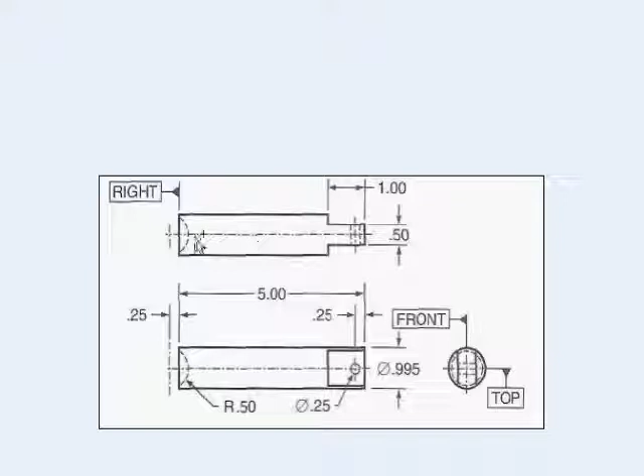I'm going first to draw this section that you see here. Then I'm going to revolve it about this axis, and then I'm going to draw this part on the surface of the already revolved part and extrude it. Then last I'm going to place my hole. Okay.

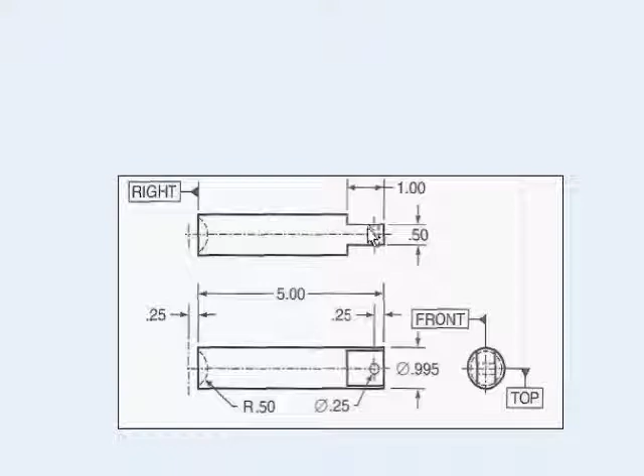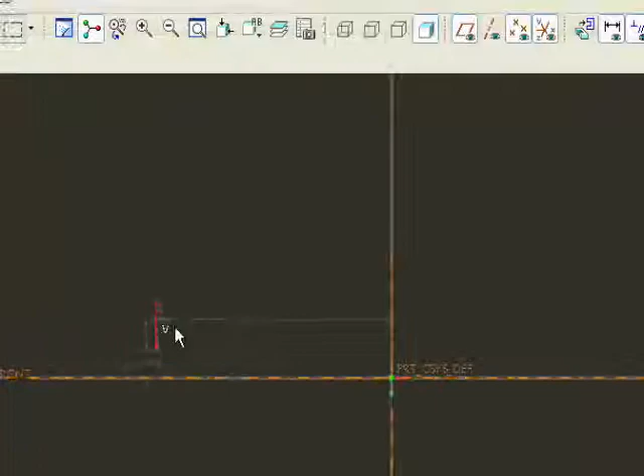For the planes, actually I'm going to be drawing this section on the top view. So we choose the top view and we go to sketch. First we choose line. This line is 0.995, half of it is about 0.4975. So we go here and we click

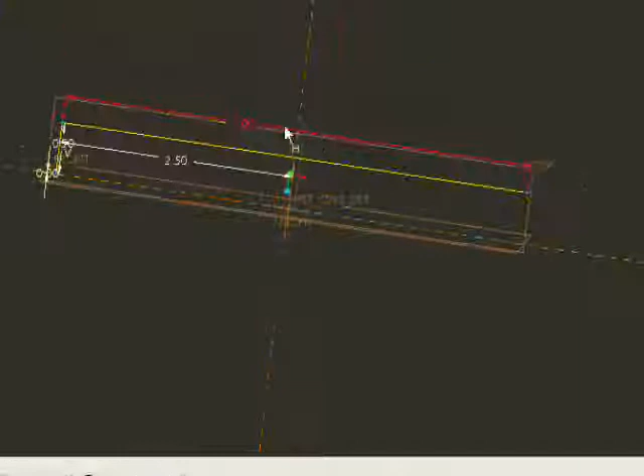0.4975, enter. And this distance is 5, so half of it is going to be about 0.25. Oh, I'm sorry, it's 2.5. So this is 2.5. No, actually we need to draw it 5 minus this distance, which is 1, so it is going to be 4. Only 4 is needed, 4 inches. And then we bring it to the center.

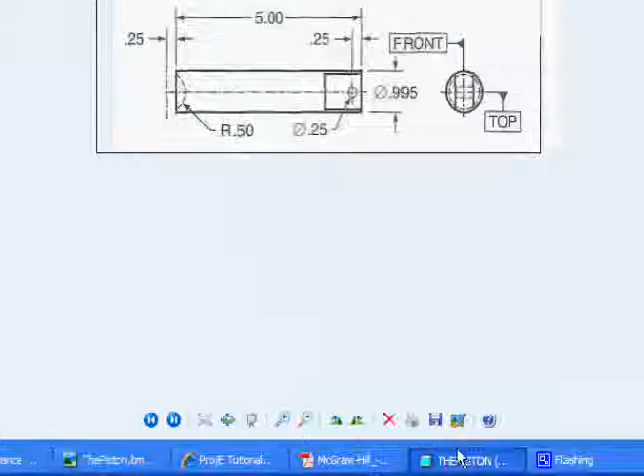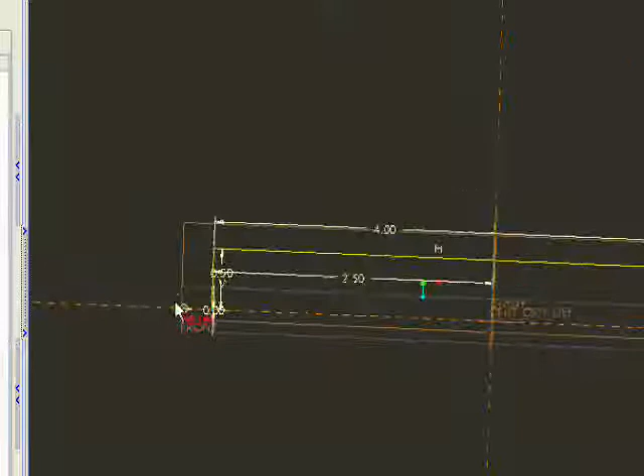So now we need to draw this groove here, which is like a circle that has a center 0.25 inches away from this edge. So we go here and we place a point, and we set its distance from the edge to be 0.25 inches. So now we draw our circle from this center,

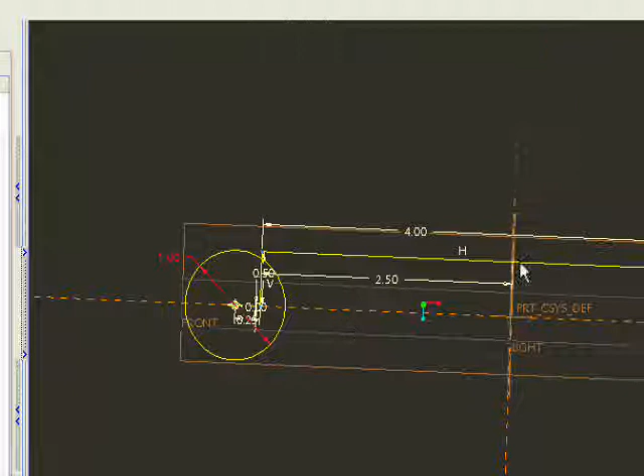and this circle has a radius of 0.5. So we go here and this is going to be 1 inch. Now we go to the trim tool and we go like this and like this. Okay, and the point we don't really need, it was just a helping aid. And then we draw this line,

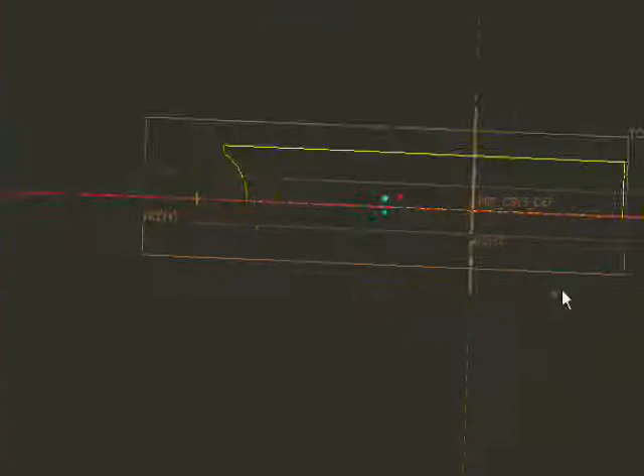and because we are going to revolve this section about this center, we need to make this a center line. Okay, so we click the check mark and then we choose our section and we make the revolve. Here we go.

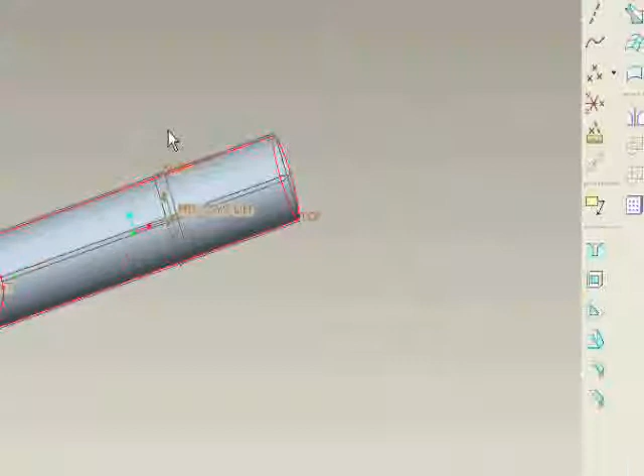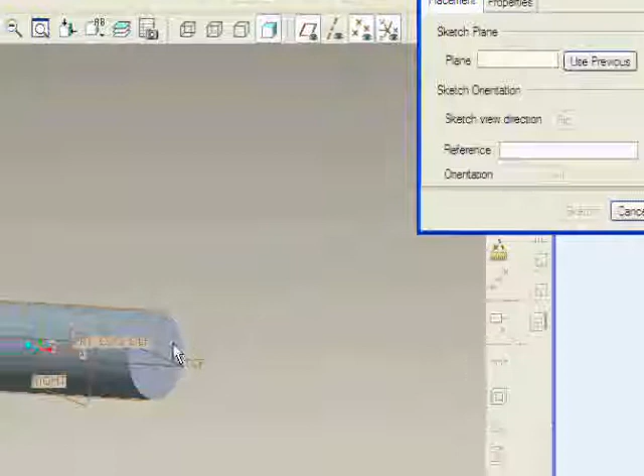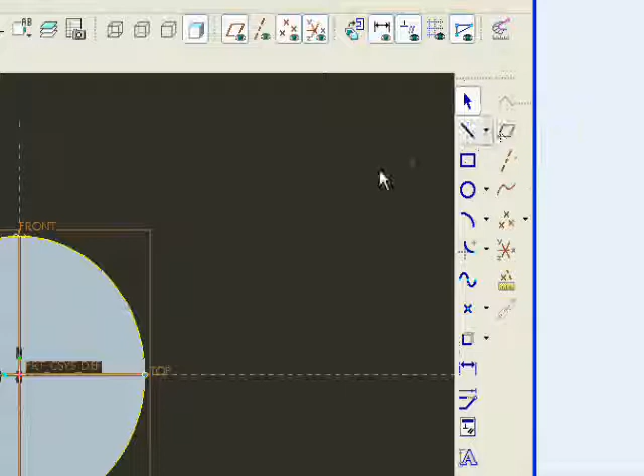Now that this one is done, the next step will be to draw this part at this surface, which has a height of 1 inch and a total thickness of 0.5 inch. So we sketch, we choose this plane and we say sketch. Okay. First we need to make some references at this section, which is going to be this circle, and we click OK and close. And now we draw the line,

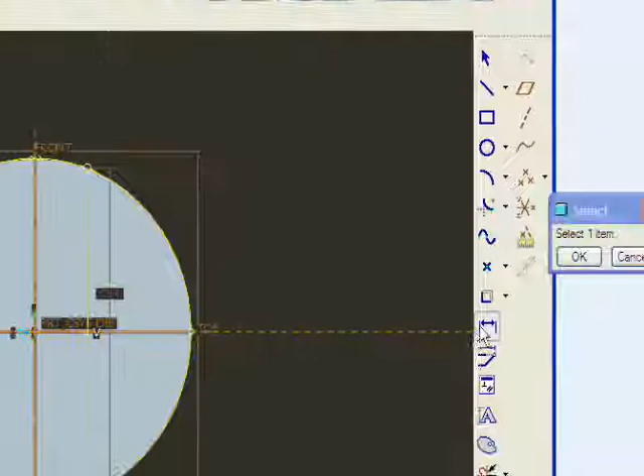and this line, as we can see, actually needs a dimension from this line to the center line, so that we can modify its distance. So we pick this tool, we choose this point and the center line, and on the wheel we give one click. After we are done, we press OK. We go there and we put 0.25 inches. Here we go.

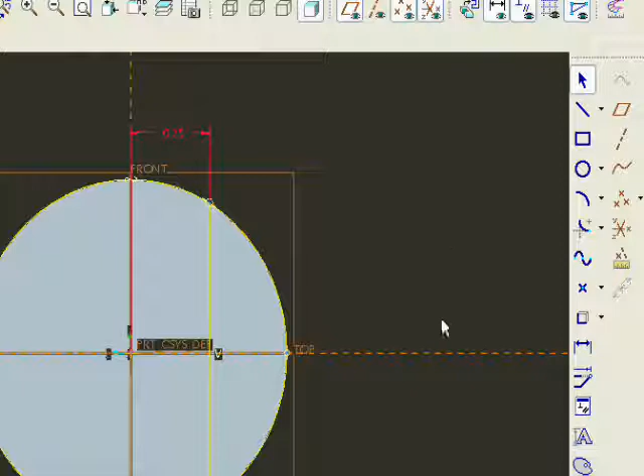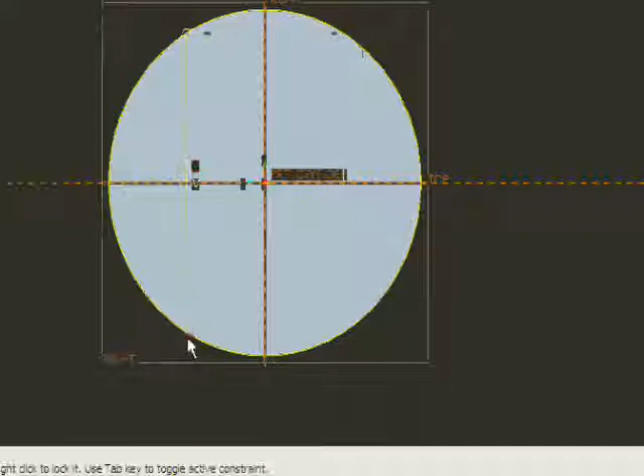Once we are done, we can also draw another line. You see, Pro Engineer automatically snaps points and lines. So you just move along the circle, it snaps to this point, which is at the same level as the point of the first line, and we do it like this.

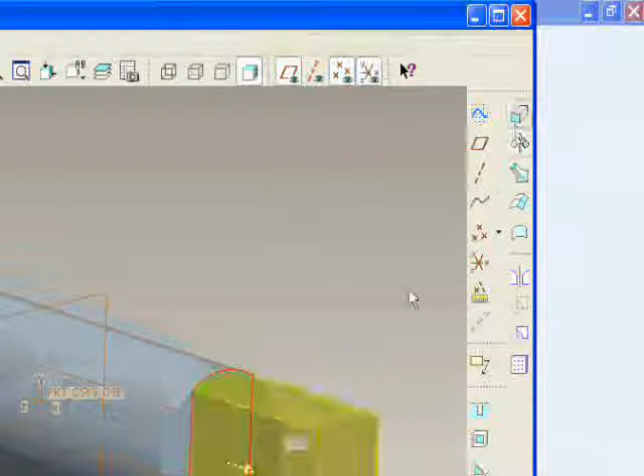So now we go to the trim and we do this, and that. We trimmed everything other than our main part. We press yes, and now we are going to extrude this to a distance of 1 inch. So here we go. It looks nice.

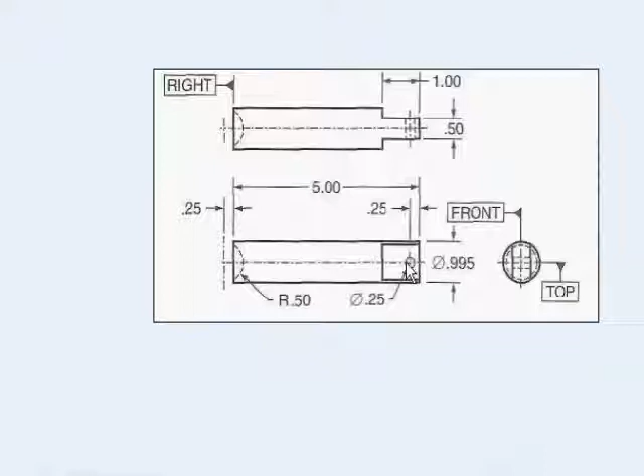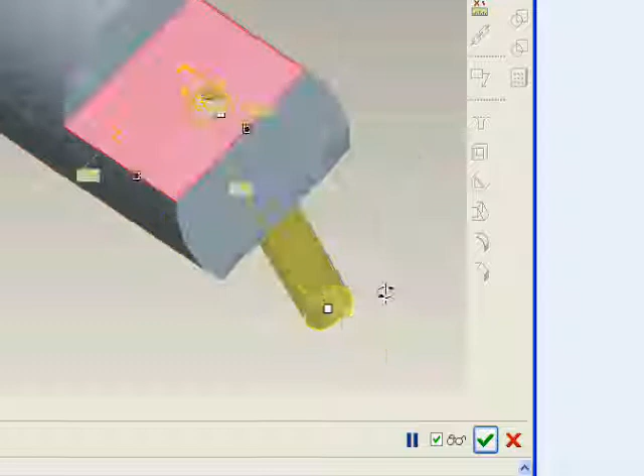So now I'm going to place a hole as shown in the drawing, which is 0.25 inches. It is going to be at the center and at a distance of 0.25 inches from this edge. So we place a hole, we choose the surface, and we stick these points, one here and one there. The diameter is 0.25 inches, and it is going to be a through hole, so I don't really care about the depth.

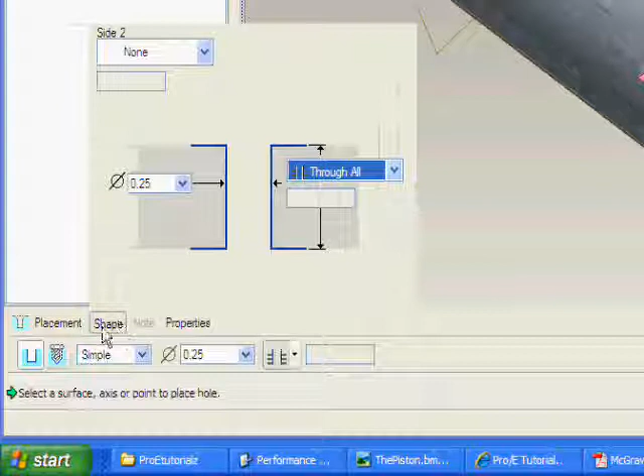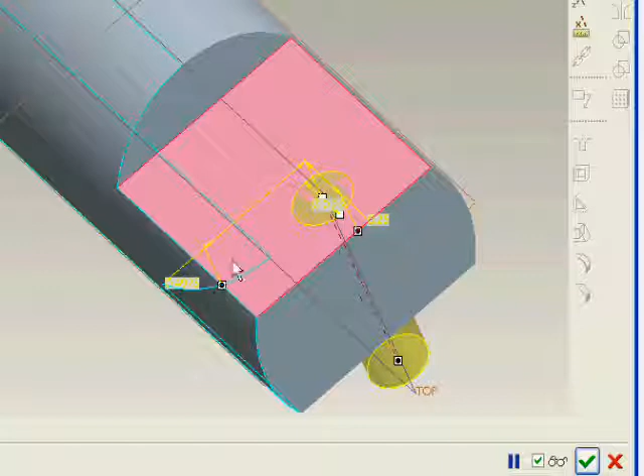Or you can also go here and say that it is a through hole. That's it. This is one option. The other option is just to extend the cylinder so that it goes all through our part. So this distance is 0.25 inches, and this one is 0.4975. No, not really. Oh, I'm sorry. I meant this one.

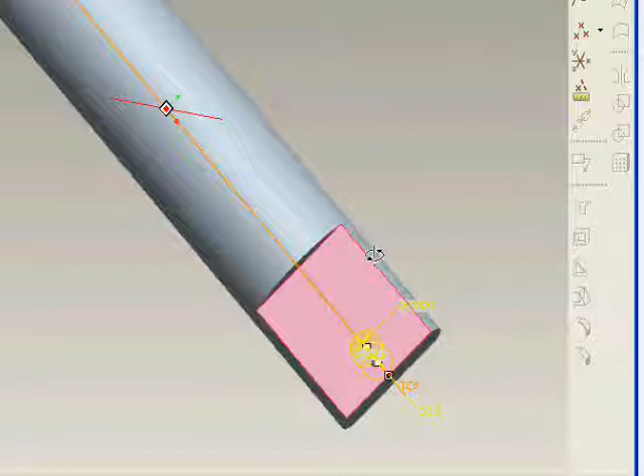This one, I'm going to stick it on this plane, and give it a 0 so that our center remains on the same line of this plane. So now we are done. We press yes, and here we go. Now we are completely done.

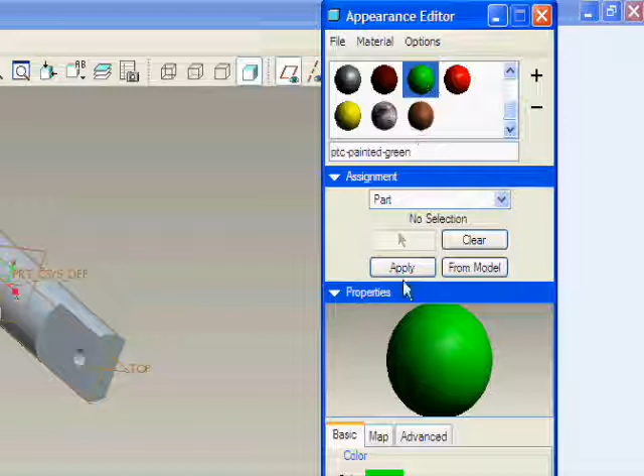So we go to view, color and appearance. Let's choose a green color. It's a bit bright. We make it dim and we play with this stuff here. I think this one also looks nice.